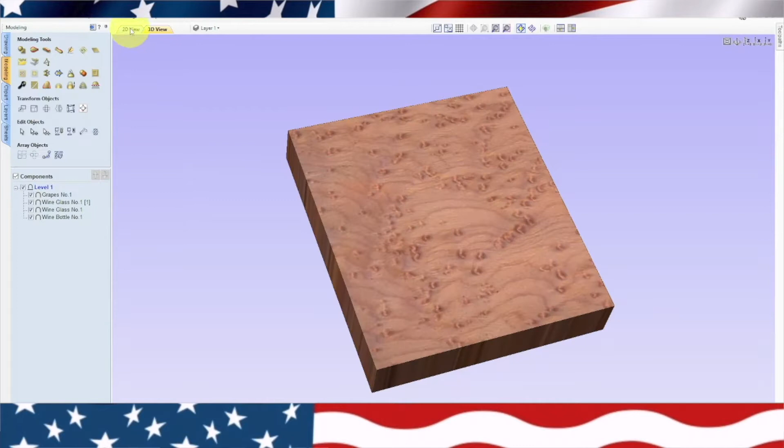And there we go. Now, obviously it came in kind of upside down, so I'm going to spin it around here. Probably something like that. Now I'm going to move this down. I don't want it to bury the wine glass. Let's see, like right there. So you still see the stem of the glass and the grapes coming across. I kind of like that.

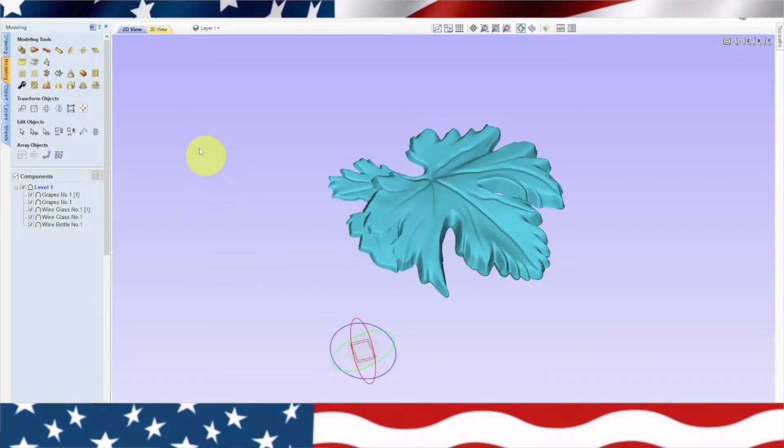So I'm going to mirror that. Flip that horizontal. So we'll have 2 of those and close. The next thing I want to do is bring in a leaf. That's really my last thing I need. So I'm going to bring that in. Obviously, it's going to come in really big. You can see it's covering the whole thing.

So we're going to highlight that. Grab the little node, hold the shift key down, and make that as small as possible. It's almost disappeared there, but there it is. We'll go ahead and make it a little bigger. Now, I don't want it too big. I want it to be realistic, so I think we'll put this right there. So it's kind of connected to that little stem.

However, I'm going to rotate it so that the back of it looks like it's part of this grape. There we go, like right there. Now I'm actually going to move it up a little bit, and I want to move it to the back and click out. So there it is, kind of behind it but connected there.

Now I need 2 of them, so I'm going to highlight that again. I'm going to go up here and mirror objects, flip it horizontal, and it should be the same to the back. So we'll click out of there, and you can see it's behind, but it's connected to the grapes. So the grapes are kind of intertwined with the glasses. So far I like all that.

Let's go ahead and highlight it. We'll hold the shift key down and we'll highlight everything else. Okay, so you can see over here we have quite a few 3D objects. Now what I want to do is center it. So I'm going to use my centering key, leave them all highlighted, and this should move them up. So apparently we're in the center. Now, I can see the bottle.

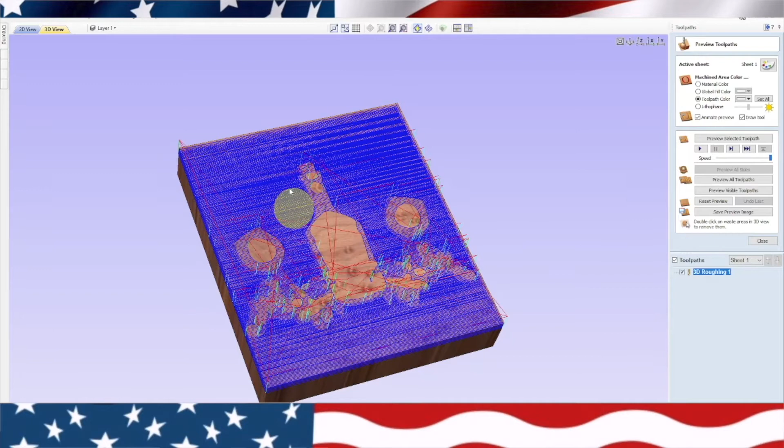We'll hit OK. Now we want material boundaries so that basically it's going to leave these pamplemousse letters high along with the 3D model. Now let's try that out. And I don't see my letters anywhere, so that might not have worked. So let's preview. And that did not work. So we're going to delete that. We're going to reset the preview, close, go back to our 2D.

So we need to do two separate things. We're going to have to do the pamplemousse letters on a different thing. Oh, these are ungrouped. So let's go to our 2D view. Let's hold the shift key down and group all our 3D objects together because we're going to have to cut all that at the same time. Now hit right click and group objects. So now if we touch on one, it's all of them.

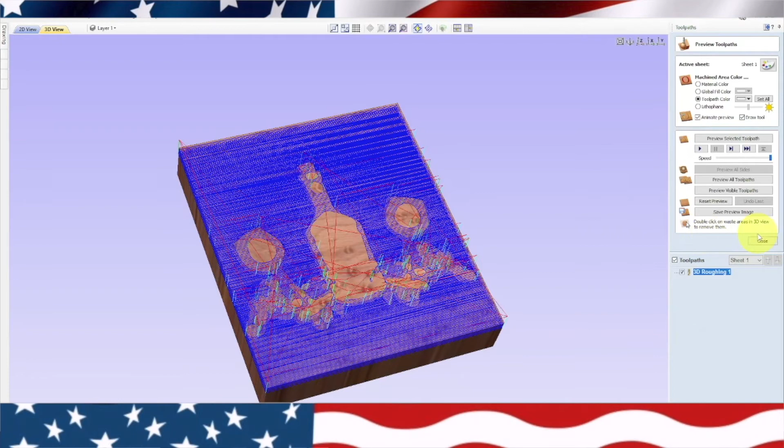So I think what we're going to do is we'll V-carve the pamplemousse cellar and do an epoxy inlay and then stain the rest of this. So the first thing we need to do, the thing that takes the longest, is the roughing toolpath. So we'll go ahead and hit the roughing toolpath. We're going to do material boundary because I want all of this to come out. And it's going to take a little time to cut all that out. So we're going to go ahead and calculate. Now we'll close that.

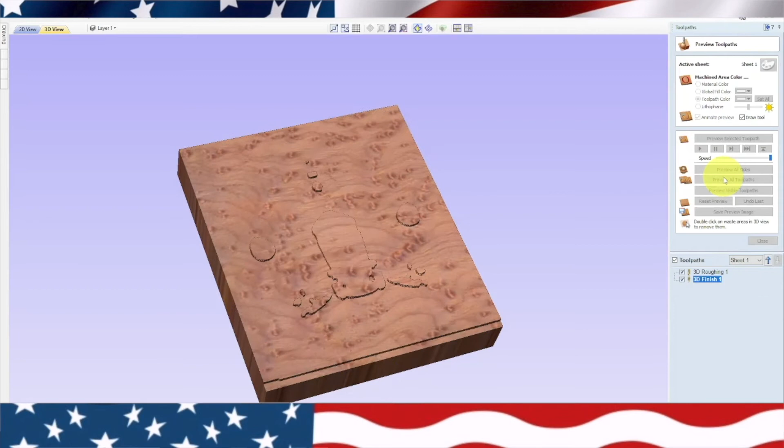We'll go ahead, leave it highlighted. We'll do our 3D toolpath. And this is a 46288 Amana tapered ball nose. And we're going to do the same thing, material boundary, and go ahead and calculate. Now that's going to take a little time because it's doing this whole square. Now we're going to preview all so we can get an idea of what this looks like. And that's looking pretty cool. So you can see it's cut quite a bit down, but it's leaving some out, and you can really see the details in the grapes and everything.

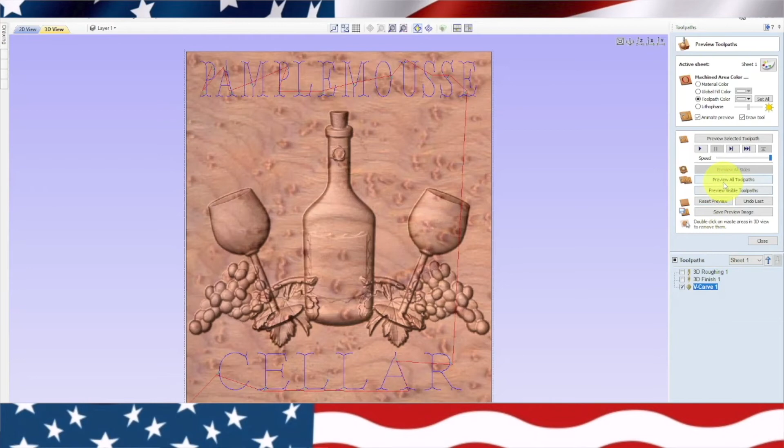Okay, next up we'll go back to our 2D view, and we need to do the V-Carve. So we're going to V-Carve these letters, and there's a trick to that. So I've got the pamplemousse cellar highlighted. We're going to go ahead and hit V-Carve. Now there's a button down here, project toolpath onto 3D model. So let's hit that. Now this should change the whole thing. This should basically get down to that modeling toolpath. So preview visible toolpath, and there we go. So now we're in the model.

And I've got to decide if I like that.

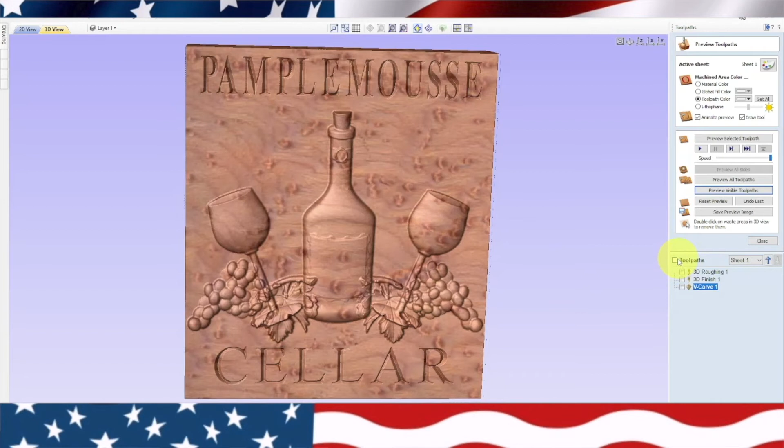And yeah, I'm going to send this to my friend Jeffrey. This is a fun thing to do. Anyway, okay, so now we are done. We're going to go ahead and highlight all the toolpaths, save them, and go start cutting this out. Yeah, this looks good. And I'm basically repurposing a cutting board; it was kind of a nice cutting board. So actually he'll be able to flip this over. Oh no, he won't actually.

Because if he flips it over, the 3D model will be in the way. So yeah, this started out as a cutting board, but it didn't sell. Actually I sold a lot of them, but I still had a couple of these, and I wanted to do something fun today. Anyway, let's save this and we'll go over to the machine. Okay, I'll see you over there.

The first thing I do is I get my material all wedged in and get it clamped down real tight. I'm using a couple Rockler T-track clamps on the bottom, and then I wedge in the 3 sides with some wood. Now I had an idea actually to clamp the 2 pieces of wood before I screw it together, and that actually seemed to work good. This thing was really solid on this board. Right there you can see I clamp it, put some screws in it, and that worked pretty good.

I ended up throwing another block on the back here, and yeah, it held really nicely. And that's really important when you're doing any CNC project, is have it really square. The next thing I do is I home the machine, and that's basically down the checklist. These are all the things you got to do. I also get the vacuum system ready and turned on. I then change to this bit.

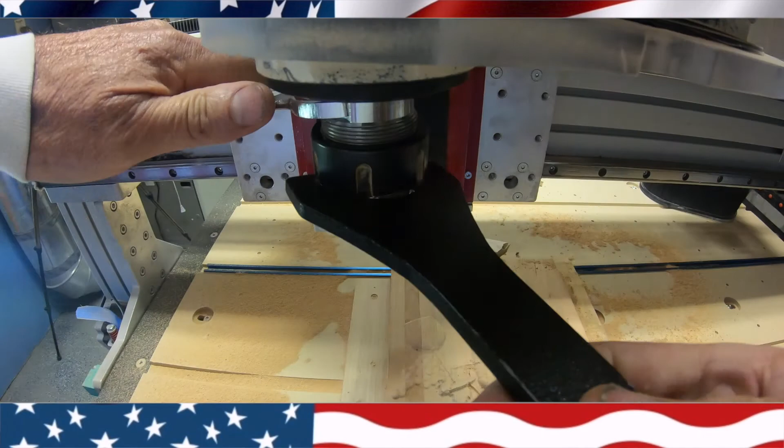This is 20 times speed, and I'm shooting this with my GoPro, and it's cutting really nice, perfect. Yeah, you just have to remember to Z out at the top of the 3D model, and that's an important thing to remember for myself. Anyway, I'll speed this up a little bit. I think it took about 3 hours to make this all together, maybe 4. Right here I put the V-bit in, I Z it off to the top of the model, and it cut perfect. So that was an important lesson, and right there you can see the finished product.